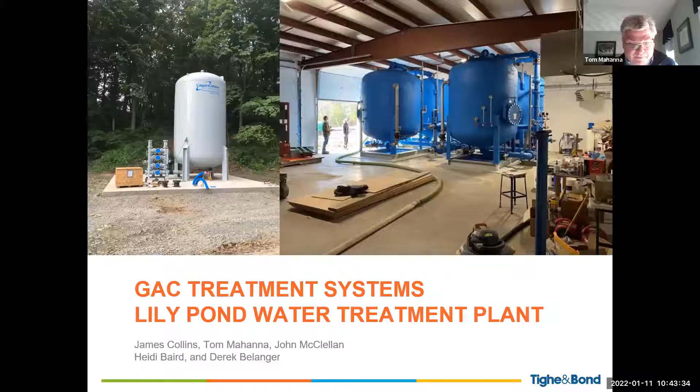Just wanted to give a very quick overview of the firm and our project team. A little bit about our company: we were established in 1911, so we're over a 100-year-old firm. We have over 400 professionals located throughout our 12 offices in the Northeast. We have offices in all the New England states except Vermont, and also one in New York. Next slide, please.

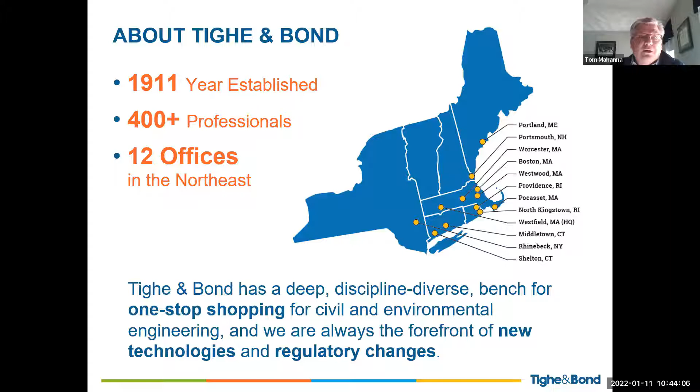This slide represents a very quick, brief summary of all the capabilities of our firm. We're a full service firm. These represent the five different core services we provide. Basically what we're trying to show is that for this project we would provide all of the services required with in-house staff, with the exception of survey and drilling services, which we would subcontract out. Our firm provides everything with in-house staff, from the environmental permitting required, all the way through design, building design, process treatment design, geotech services, and we also do SCADA programming. So full service firm, everything done in-house.

We would, if selected, utilize a local surveyor. We've used Morse Engineering, for example, on our Scituate projects, which is a local civil firm.

Next slide. So I want to talk a little bit about our project team. On the call today are five key members of this team. Our project team is headed up by myself. I'm a vice president / project director on the project. A little bit about my experience: over 30 years of experience. I have multiple similar projects that I've completed, similar to what this project would be, throughout the years.

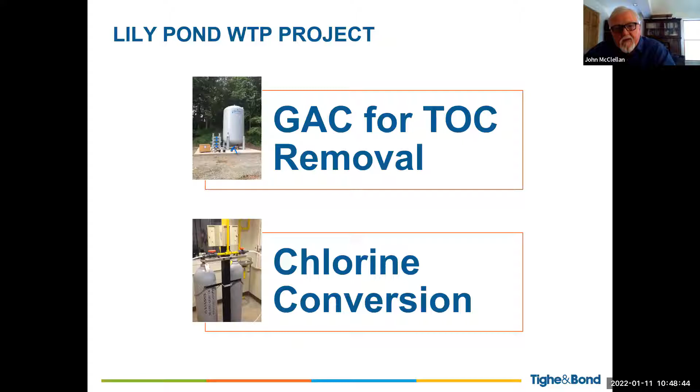Our understanding of this project is that there are two components to it, really. The first one is a GAC, granular activated carbon system for removing TOC, which is a DBP precursor. The other aspect of it is to convert the plant from gaseous chlorine to a hypochlorite chlorine system. Next slide, please.

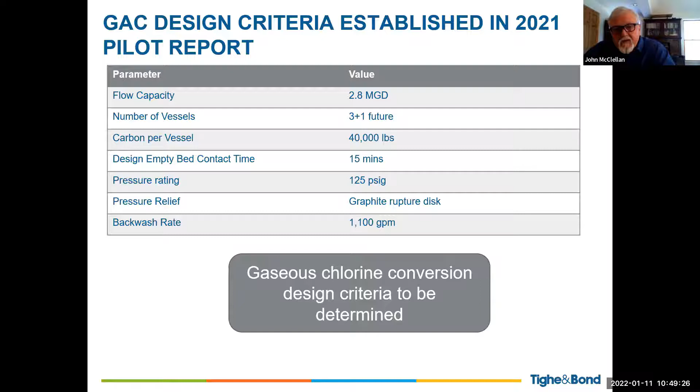Our understanding again is that the design basis for the GAC component of the project has already been determined. A pilot study has been conducted by others. This slide basically shows what the basis of design for the GAC treatment system is going to be: flow capacity, number of vessels, and so forth. The gaseous chlorine conversion, as we understand it, is part of the scope of this project for us, and we would determine the design criteria as part of the design. Next.

So the next couple of slides just illustrate our experience on GAC pressure vessel systems, and importantly, dealing with Chapter 149. We've done a lot of SRF projects, and as you can see on this chart, several of them in Massachusetts.

Many pressure vessel designs and a number of pressure vessels with GAC treatment design as well. For Aquarion Water Company, South Central Connecticut Regional Water Authority are 2 of our large clients, and then also many Massachusetts municipalities and water systems. I won't get into the details of these unless anybody has questions on the specific projects.

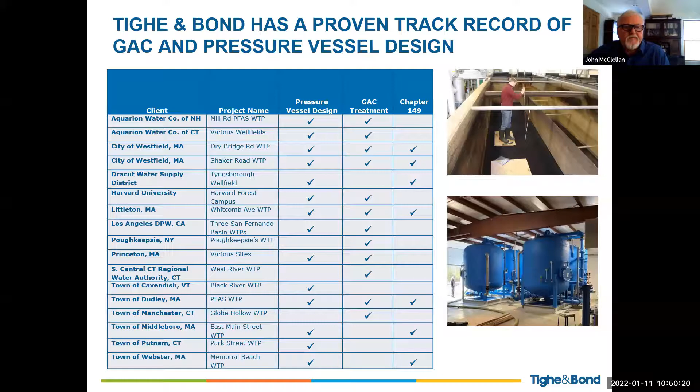This slide basically is a similar listing of our project experience with chlorine conversion. Some of these are fairly large plants, Aquarion Water Companies.

Putnam WTP is a 25 MGD plant. We've also done large plants for the Metropolitan District in Hartford, Connecticut, and South Central Connecticut Regional Water Authority. So in short, we have a number of projects for chlorine conversions under our belt, and also Massachusetts municipalities, including State Revolving Fund and Chapter 149.

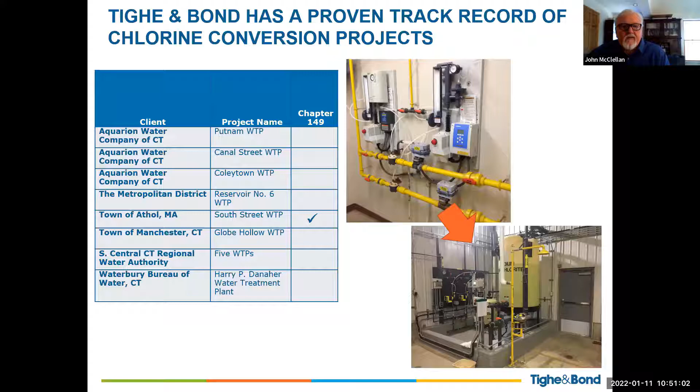Okay, next. Now I'm going to turn it over to our project manager, James Collins. James. All right, thanks. Good morning, everyone.

So as John described, some of the major process design decisions have already been selected for this project. So now the project is moving into the delivery phase for designing the water treatment plant upgrades.

So one of the keys for project delivery is managing and reducing the risks associated with the project. And from reviewing the project, there are several that jump out to us as being critical for project success. First one being controlling project costs, dealing with permitting.

With any water treatment plant upgrade, there's always going to be technical challenges and decisions that have to be made, and also thinking about the project schedule. So I'll just kind of jump into each of those quickly a little bit.

So in the RFQ, it included an estimated cost of $3.6 million. So we looked at several current water treatment plants that recently went to bid or are right around the final design phases as just a point of comparison for looking at project costs.

Westfield Water Treatment Plant is four 40,000 pound GAC vessels, which is a similar size to here. That one just went to bid in December. We got bids in, and that was a $12 million project.

Dudley, Mass Water Treatment Plant, which has two 40,000 pound GAC vessels, chemical feed systems, simple metal building. That one came in at about $6.5 million.

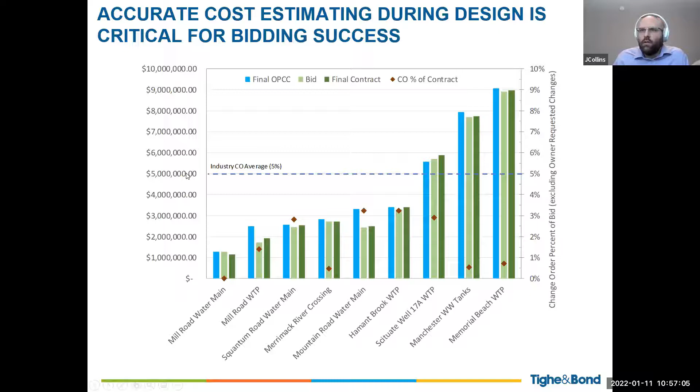Based upon recent projects, where are you seeing them come in, similar projects? So I think Dudley would be a good example, Jay. Dudley's probably the closest. Sorry, I went too far.

So this one is two 40,000-pound GAC vessels. You're proposing three, so it's a little bit bigger in terms of the equipment. This one does not have any tankage involved with it, and it has a simple pre-engineered metal building. So that one's coming in at 6.5 million. There is some site work and piping that goes along with that. So some of those items will impact the cost for your project in terms of how much yard piping you have to do. If you need tanks to break head and then repump through the GAC vessels because of the additional head loss, all those would impact the cost as well.

So I think what you're probably saying is that we could be double the 3.6 million. Without getting into all the details, yeah. It's reasonable. Okay. It's possible. All right, no, it's very helpful. I appreciate it. These are really important things for us to know.

Yeah. Thank you, I'm sorry to have interrupted. Nope, yeah, feel free to jump in at any point. This doesn't need to be a lecture, so okay, feel free to jump in.

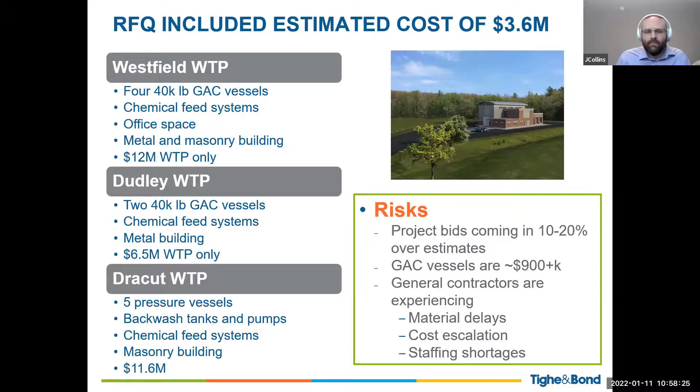Okay, any other questions before I move on? Nope. Okay, the other aspect of this is permitting. Permitting is always going to be a challenge. Mass DEP does have a lot of growing experience with GAC, primarily driven by all the PFAS work that's going on in the state. And we've worked with Mass DEP on GAC projects across the state, and there have been some oddities in the permitting process with GAC. One of the things that's come up on some projects has been arsenic.

GAC media does have naturally occurring arsenic in the media that will leach out under initial startup. The Calgon F400 that was proposed in the pilot test report is one that is known to have elevated arsenic on startup. So we have seen DEP put arsenic limits on some of the designs. It's not universal, it depends on the regulator you have, but those can have a big impact on your design. From media selection, you could have to purchase acid rinsed media, which increases your costs fairly substantially for the media itself. Or you may also have to consider a filter to waste capability so that you can flush the arsenic out before putting it online.

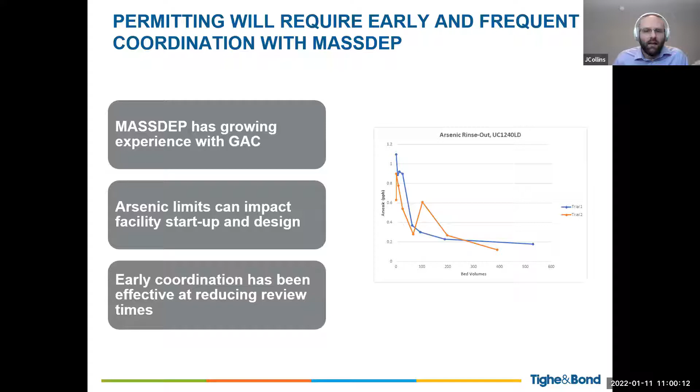So really early and often communication with DEP is what's recommended. That also helps with getting your permit approvals through much faster. We've been able to get turnaround sort of in the 3-month time frame with DEP by working with them early. When you don't work with them early, that permit review process could be 6+ months. So permitting can be really a critical factor for project success.

Technical challenges, again, as with any water treatment process, there's always technical decisions to be made. When you have large pressure vessels, humidity control is always a challenge. These vessels love to sweat in the summer because cooler water going through the steel vessels causes sweating on the piping and vessels. There's various ways to deal with that. Some facilities we've designed just let them sweat and deal with it through floor drains or gravel to contain the moisture. Other systems go all the way to dehumidification, so there's no sweating, but that comes at a capital cost. We've also worked with some facilities, pictured on the right, doing spray insulation on the tanks, which is a bit higher on capital cost but has no annual O&M associated with it.

Another item that came out of reviewing the project is future expansion can also be challenging. The design calls for 3 vessels currently with space for a future 4th GAC vessel. These vessels are significant in size, 40,000 pounders, 25,000 pounds a piece empty, 27 feet tall. So moving these things around can be very challenging. Using cranes is often the easiest way to do it, but that also has impacts when you already have a building put around it.

One option we've looked at recently for a similar project with future expansion needs was roof hatches, but just putting in a roof hatch on a pre-engineered metal building ended up costing $100,000 for a 15 by 15 roof hatch. So there are other options, knockout walls or removable wall panels that can be considered. But all of this is important to consider when getting into the detailed design of how you'd put in that future vessel.

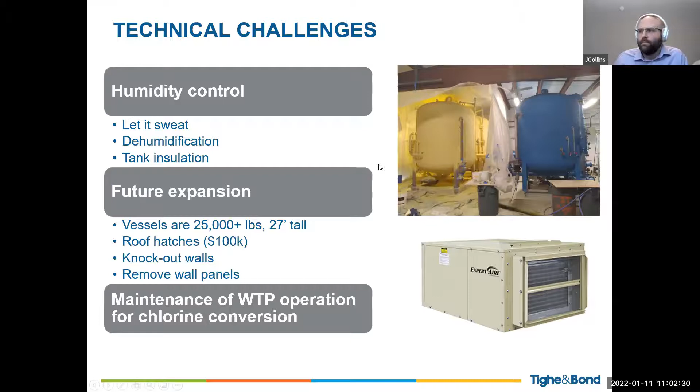And then finally, construction schedules. We're seeing construction schedules being impacted by COVID, as with everything else. The demand for materials has gone up, as well as issues with supply chains. GAC vessels used to be 12 to 16 week turnaround time from approved submittals. We're now getting quotes for 40+ weeks. Similarly, on the metal buildings, costs are going up as well as lead times. Metal buildings are now 40 weeks from approved shop drawings. So now you're looking at about a year from notice to proceed before you get GAC vessels or a metal building on site. That's impacting construction schedules as well as costs.

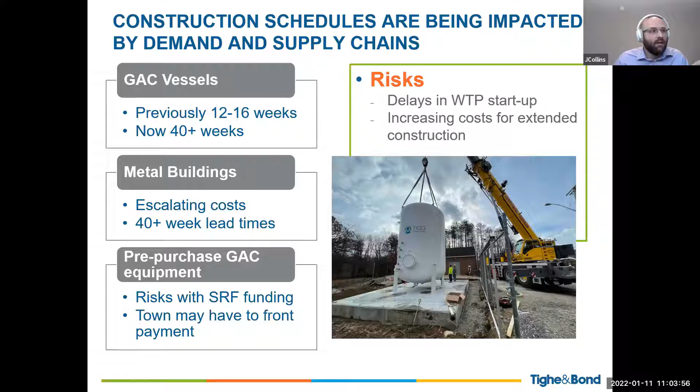There are some options to try and mitigate that. We've worked with several of our clients to pre-purchase the GAC equipment. That means you can lock in your price early in the project, as well as start the fabrication schedule so you can reduce construction times. That does come with some risks if you want to go after SRF funding. The SRF program doesn't necessarily like you pre-purchasing equipment because they want to make sure you go through the proper bidding process. We've had success working with SRF to pre-purchase a GAC vessel for our PFAS water treatment plant project, but that comes with some risks and close coordination with DEP. So pre-purchase is something to consider if you want to lock in your pricing early in the project.

Just thinking about project schedule, it's really going to be driven by the SRF. Our understanding is that the project has been submitted to SRF for funding. We hope to see the 2022 draft IUP in the very near future, in the next month or so, with likely the final IUP being published hopefully in April. That does fluctuate a little depending on when the state gets all their information from the federal government. From there, that really dictates the design schedule to meet all the SRF deadlines.

So our proposal would be getting the 25% design done by March, 75% design by August, and the 90% design done by October. That's really driven by the Part A application for DEP, which is due on or before October 14th, and typically with that, we include our 90% design submittal.

So that's the big deadline from the loan application. The other big deadline to be aware of is there must be a town meeting or city vote by June 30th of this year, 2022, to go after the SRF funding. Our understanding is there already has been a vote on this project. The key would just be making sure that that vote would cover accepting the SRF loan and the terms of that.

Moving forward from that, project approval certificate, sort of approval of the loan, is likely end of the year 2022. They try to target December 2022, but that doesn't always happen. We haven't necessarily received some of those for this year's projects that we're working on. So with that, you're kind of targeting bidding early winter 2022, early 2023, and then getting all your contracts awarded, notice to proceed in the spring of 2023.

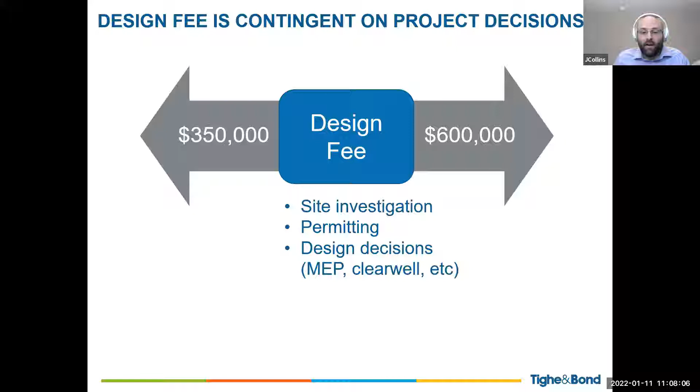So just to wrap it up on our end, why select Tighe & Bond? A couple of advantages we think we bring are a dedicated and consistent project team. As Tom mentioned, the team we're proposing has worked on nearly identical projects across New England, so we have a team very familiar with these processes. We can bring those lessons learned from those projects to this project, and with those projects, we have a proven track record of delivering on time and on budget. We're ready to start the project immediately from notice of award.

We also, as Tighe & Bond, put a high level of importance on our service, responsiveness, and communication. We only work in New England. As Tom mentioned, we're a New England firm, so we pride ourselves on our delivery and our client service to our clients in New England, because repeat work for clients in New England is what drives our business. So we put a high importance on serving our clients.

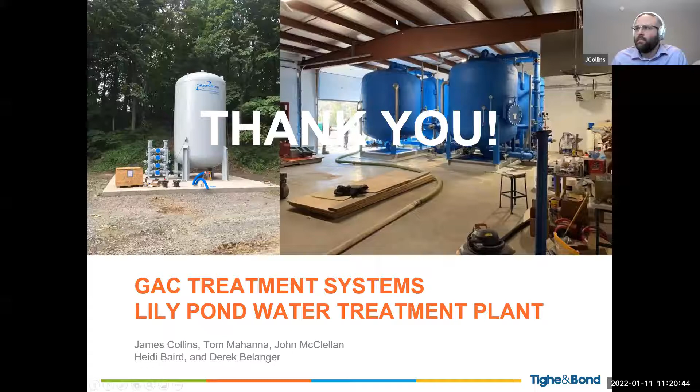One note on the arsenic situation, for reference, the existing sludge has arsenic in it from the treatment process. Looking at last year's results, we were at 7.99 milligrams per kilogram arsenic in our sludge sample. So I don't think sludge from a backwash would significantly elevate a year's worth of alum sludge, given that arsenic level, but you could take a look at that with DEP.

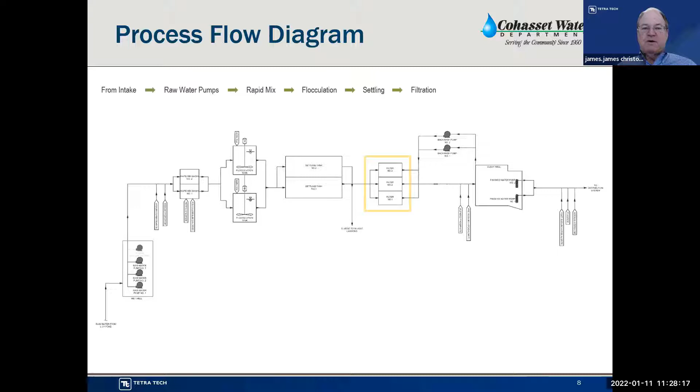Thank you, Tony. Just to walk the commission through the existing process, to place the improvements in context: currently water is withdrawn from Lily Pond via a set of raw water pumps. It then goes to the rapid mix basin where chemicals are added for removal of color, organics, suspended solids, pH adjustment, and taste and odor control. From there, it goes to a set of flocculation basins, where the water is slowly mixed with the chemicals to form particles large enough to settle. It then goes to the 2 sedimentation basins where solids are separated from the liquid, and the clarified liquid goes to a set of 3 filters for further clarification.

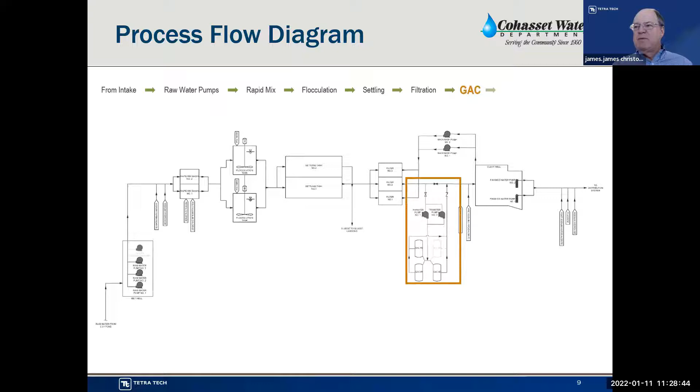It's then fed a gas chlorine solution for disinfection. It goes to the clear well to get the required contact time, and then is pumped out into the distribution system. For this project, we're proposing to add GAC between the filters and the clear well to reduce the amount of total organic carbon in the water, which reacts with chlorine to form disinfection byproducts.

Schematically, we would tie into the filter header, provide a set of transfer pumps and a small wet well. We would pump the water under pressure to 3 GAC contactors, and then return the water to the line to the clear well.

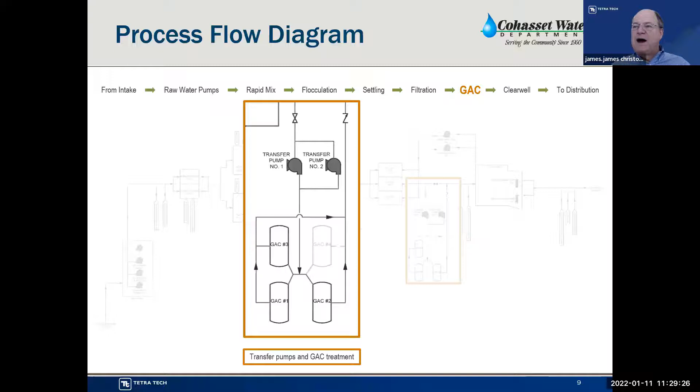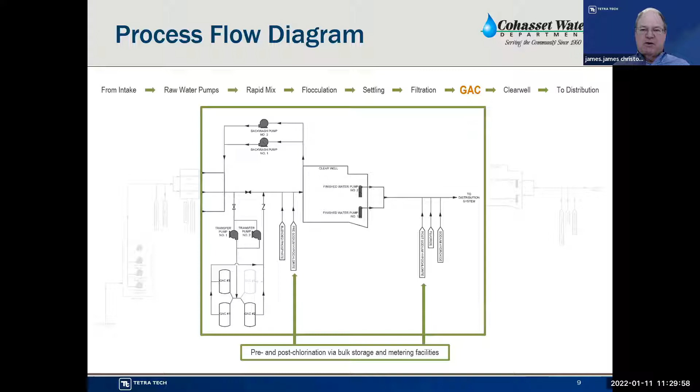Then the companion improvement: there are currently 2 chlorination points, one for primary disinfection before the clear well, and a second as the water leaves the facility for secondary disinfection. So the second part of this project would be to replace the existing gas chlorination system with a sodium hypochlorite feed system.

This is an approach to installing the sodium hypochlorite feed system, where in the existing chlorine storage cylinder room, we would install a bulk hypochlorite tank. We believe 2,500 gallons would provide up to 30 days of storage of sodium hypochlorite, plus some additional volume so you don't have to drain the tank completely before refilling it.

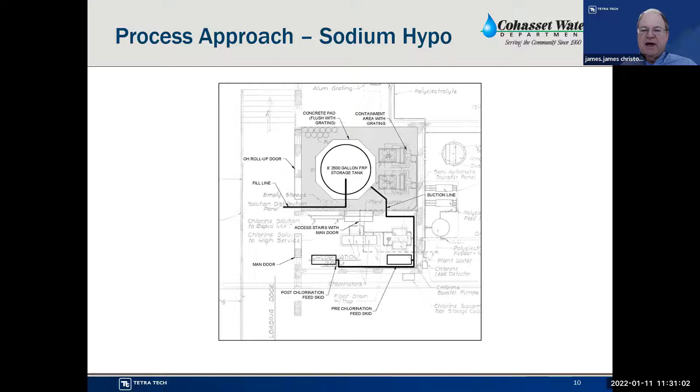Then in the chlorine feed room next to it, we would install 2 sets of chemical metering pumps to send the sodium hypochlorite solution to the 2 existing application points.

Then the GAC system: we would pick up the water from the filter header, go to a small transfer wet well, pump that water into the GAC facility, and then return it to the clear well piping. This is a basic layout of what the GAC system might look like using a quad layout. We've also done these in linear layouts, determined based on how the facility fits best on the site with minimal disruption to existing improvements.

And there would, alright, I'll move on. You want me to back up, James? No, I was just going to say that...

In addition to the vessels, we would need to provide HVAC equipment to climate control the building, and we would provide roll-up doors in appropriate locations to make it easy to do the carbon change out, which also means when we site plan this, we need to make sure access is provided to the building so the change out can be performed. The way we've envisioned this, one of our assumptions, is that this building will be dedicated just to the GAC system, with no other companion uses.

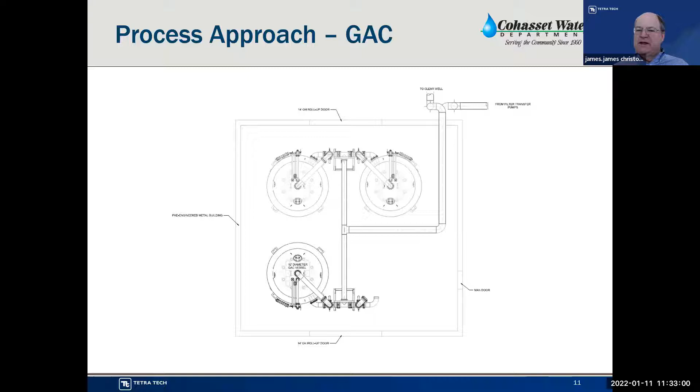Okay, Tony. So some key assumptions we've made about the sodium hypochlorite system, as shown on the preceding slide: we believe it's feasible to locate the new equipment within the existing gas chlorination storage and feed room. One thing I didn't point out on the previous slide, we would be installing a roll-up door on the storage area so that we could bring the tank in.

Another assumption we've made that would have to be investigated during the 25% design is that the existing structure can support the load from the new bulk storage tank.

Another thing that we would need to work out with the building department is the classification of the building to determine whether they would require fire sprinkling of the building.

We would need acceptable access for bulk deliveries. It is located adjacent to the existing loading dock, so we think that is probably a reasonable assumption.

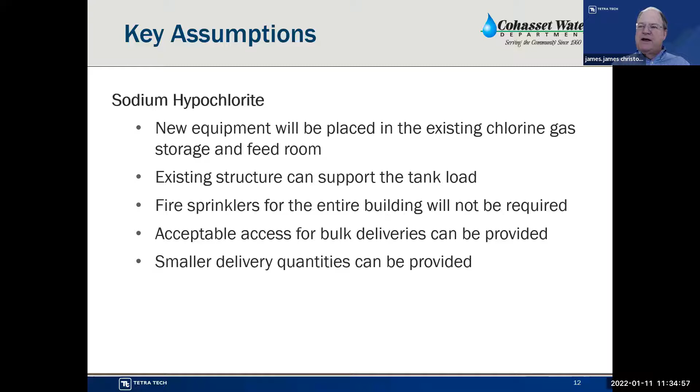And one more assumption is that we would contact the sodium hypochlorite suppliers to make sure that we could cost-effectively receive smaller delivery quantities, because that 2,500 gallon tank probably maxes out the storage in the existing room. And if we needed more storage to accommodate a full delivery, which would be a little over 4,000 gallons, we would have to make another arrangement for the bulk storage.

Moving on to the GAC system, as we previously stated, we have assumed that the equipment will be housed in a pre-engineered metal building with a shallow foundation system similar to the existing structure that's there.

The town may want to go with something different to match the existing architecture. That's another issue that would be handled during the 25% design.

We have also made the assumption that the building would be dedicated to housing the GAC contactor vessels and other equipment. Restrooms and employee facilities would not be located within that building.

On the original plans for the facility, it shows the filter header being stubbed out to the outside of the building. That would be the point at which we would propose to connect, so that we didn't have to work inside the building for that.

We would place a wet well next to that, right next to the building, with the transfer pumps to the GAC system. As part of the CIP study we did, it noted that a total electrical load study should be done.

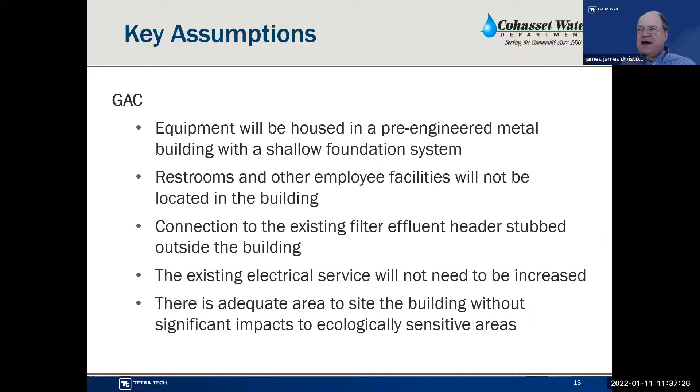And then the last assumption to make this most cost effective is that we can locate the building in such a way to avoid any significant impacts to any ecologically sensitive areas. And with that, I'm going to turn it back to Tony.

Okay, thanks James. So a lot of those key assumptions and the discussions surrounding them will really take place in the initial design workshop. And what we've laid out is a schedule, and we feel confident in this, that we can achieve the project design from start at the design workshop to finish within a 6-month period.

We've also provided a very detailed labor breakdown as requested by the RFQ in our qual statement, so you can see the level of participation by each of the team members in that overall detailed labor breakdown.

So once we get underway with the 25% design and we've had the workshop, we see that being completed within 2 months. And then halfway through that, or partial way through that, we'll have an idea of where the building will be located.

So then we can engage the surveyor and the geotech team to go out there and do the borings and provide the geotech report back to us.

In the meantime, final design will commence right after the preliminary work and then be completed over the next 3.5 months or so to get us to the point where we can go out to bid.

Our experience with the permitting process, both with DEP and with the local Cohasset departments, is that the objective would be to engage everybody early.